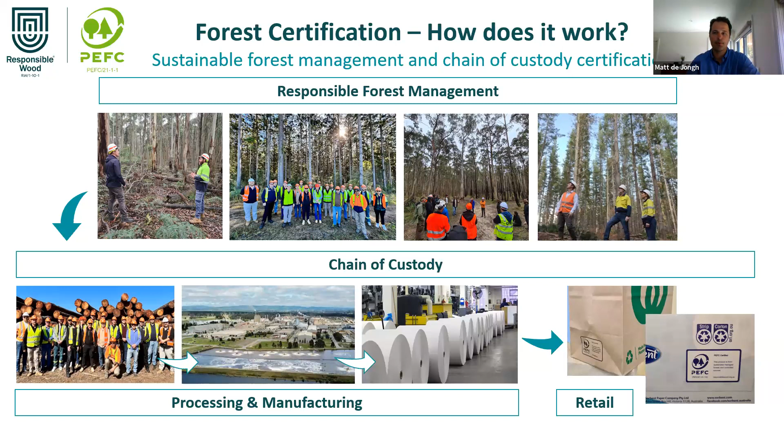So those are all examples of forests that are certified under the Responsible Wood PEFC scheme. And then chain of custody certification. So chain of custody certification basically tracks the forest and wood-based product all the way from the forest, all the way through the processing, manufacturing, retailing, wholesaling process. And that also confirms that the forest and wood-based products have not only come from a forest that remains a forest, but also confirms that it's followed a responsible supply chain process all the way through to the end consumer.

So underpinning certification is the Montreal Process Criteria and Indicators, and these are an internationally recognised reporting mechanism, which covers the environmental, economic and social aspects and management of forests. So not just forests that are available and suitable for forest production purposes, but also forests that are available and suitable for conservation purposes as well.

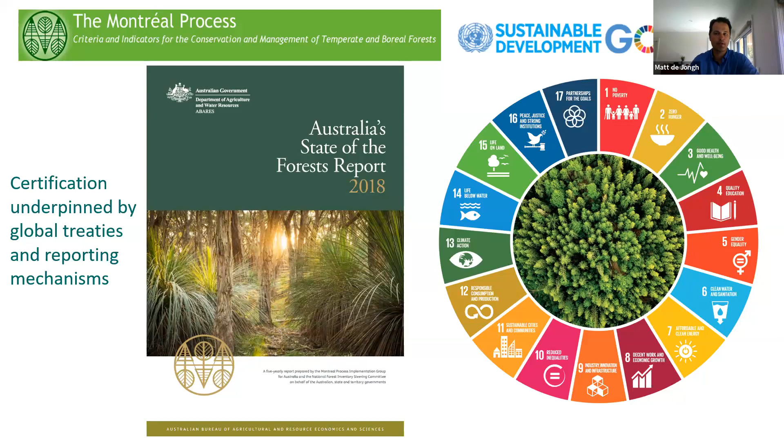Also underpinning forest certification are the United Nations Sustainable Development Goals. And these basically ensure that organisations provide a safe and healthy workplace, and also that forests provide for local communities and demonstrate a commitment to responsible practices and also minimise their carbon footprint. So forest certification is more than just a double check to make sure that organisations are complying with regulation and associated legislation. It also ensures that forest managers and forest growers are abiding by the Montreal Process Criteria and Indicators, and also the United Nations Sustainable Development Goals.

I just want to put this up quickly just to provide a brief overview of the different forest types, particularly in Australia. You might have heard the terms hardwood and softwood used quite a bit. Also the term native forest or natural forest. So in Australia, we have about 132 million hectares of native forests. And the vast majority of high quality hardwood timber is actually sourced from our native forests. When I say high quality hardwood timber, I'm talking about timber that's used for, for example, flooring and decking, and also engineered wood products as well.

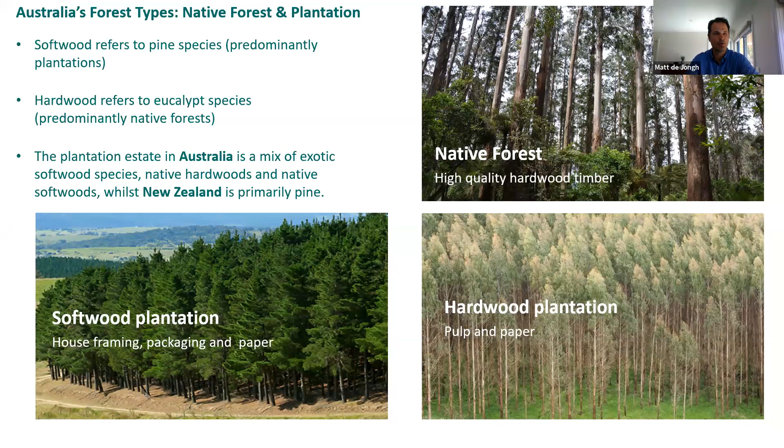And hardwood plantations. So hardwood plantations are basically eucalypt plantations, and they're generally grown on about 10 to 12 year rotations. And the vast majority of product that's derived from those plantations is used for high quality paper, for example. Sawlog material is also obtained from them, but it's primarily high quality paper used in photocopying and magazines and that type of thing. And softwood plantations. So softwood plantations are generally grown for about 30 years, and the vast majority of product derived from our softwood plantations in Australia is used for house frames, but also for packaging and paper as well. We have about 1.8 million hectares of plantations across Australia, which is pretty much evenly split between hardwood and softwood plantations.

So it's not that well known, but Australia is actually the 6th or the 7th most forested country in the world. And as I said earlier, about 132 million hectares of native forest, and about 1.8 million hectares of plantation forest in Australia.

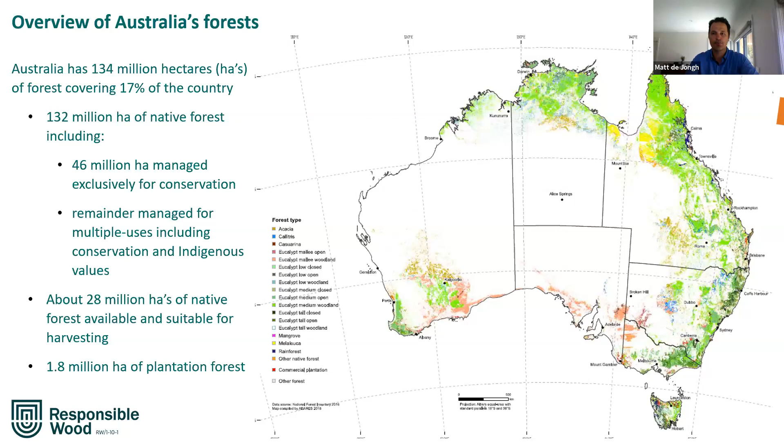So Australia's forests over 65,000 plus years have really adapted to some sort of human disturbance. It's quite well known that our traditional owners used fire as a friend, not as a foe. So what they did was they actually introduced fire into the forested landscape intentionally, because they would intentionally clear sections of the forest. And by clearing sections of the forest, they would allow for grasses to grow where there once were trees, and that would encourage large animals like kangaroos to come in and graze in those areas. And it was actually known as one of the earliest forms of agriculture, known as fire stick farming. So for 65,000 plus years, our forests have adapted to some sort of human disturbance.

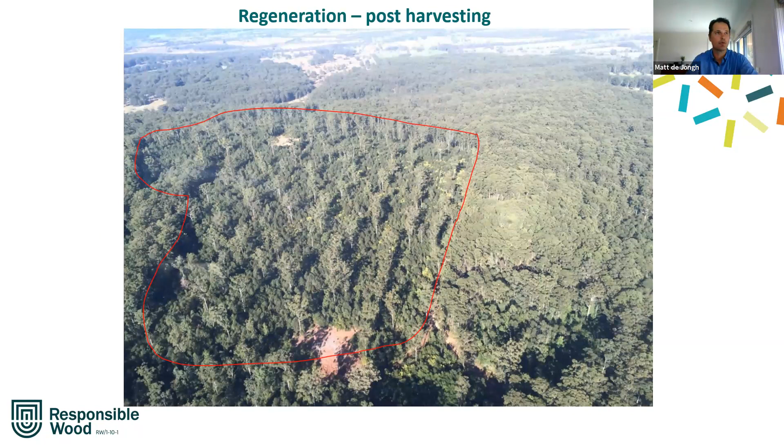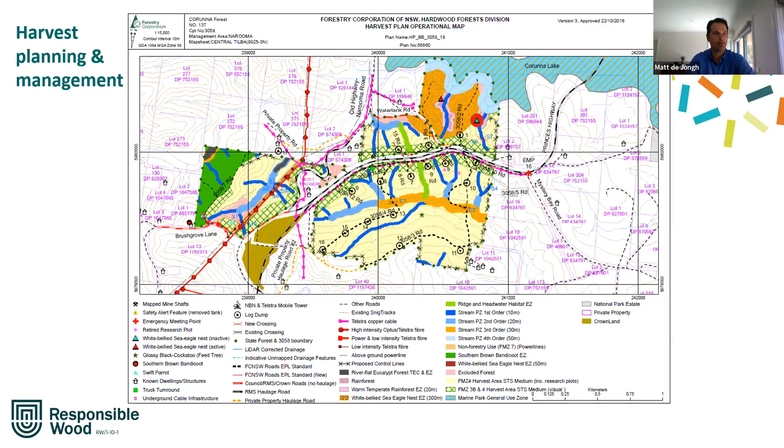And the very last slide I want to share, if you're interested in learning more about forestry and sustainable forest management, we've just been rolling out a few field trips recently. So we actually held one yesterday up at Port Macquarie, and that was actually demonstrating sustainable forest management.

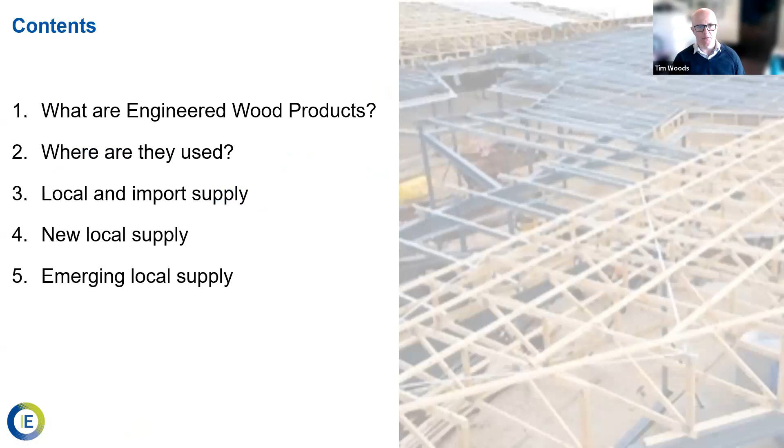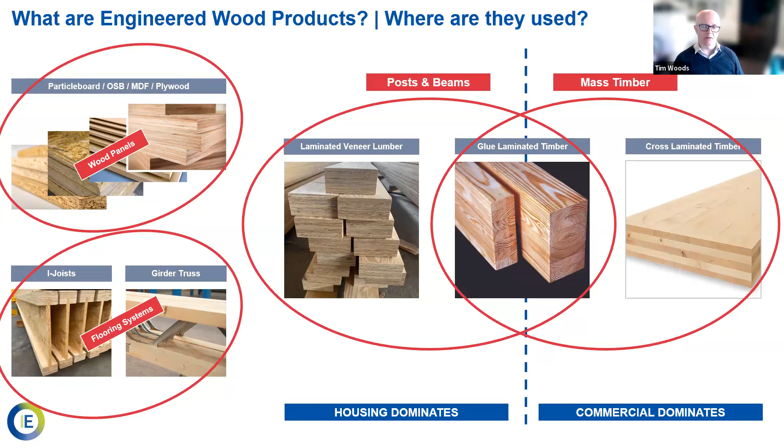You can see down the bottom there that housing dominates on that left-hand side, and the swing point, in my view, between housing and commercial / industrial buildings, is where glue laminated timber can be used in either format, just depending on the size and scale and the particular look that might be being considered, and the sustainability outcomes that are seeking to be achieved. So these are pretty efficient building products, and they're able to be manufactured from product that otherwise might not make its way into the built environment. Their use is growing fairly substantially.

And that's going to be really important for us, because the economic pointy heads, like myself, will appreciate one really key thing in our society is that we have a significantly growing population, and albeit there's been that little bubble through the trough, and now the big spike in population as a result of the pandemic, we're going to see significant population growth over the course of the next decade or more at least, but probably through the next 30 or 40 years, we'll see significant migration-fueled population growth.

And the other thing that goes with that, we've got a growing population, but we've also got significantly declining average household sizes. A household that was once nearly 3 people per household is now down around 2.5 people per household. And every time we drop that, as we did in the pandemic, from say 2.5 to 2.4, we need 140,000 new dwellings. And interestingly, every time we drop that, on average, we need smaller dwellings, because we no longer need the 7-bedroom house. We still need the 4-bedroom house, but we don't need the 7-bedroom house anymore.

We need a smaller house, because increasingly this cohort of less than 2.5 people per household means that we also have a very large number of single-person households, mainly older people, retirees, but not only those. So we're going to have more and smaller dwellings, and we're going to manufacture them in different ways. And there's a really key reason: it's because, to a large extent, our traditional process of building houses is broken. It's no longer fit for purpose.

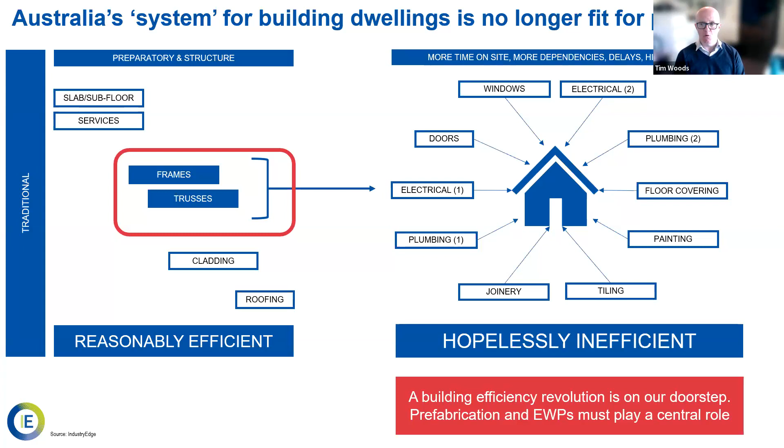So we think that if we're going to have to provide significantly more houses for significantly more people in smaller households, we're going to have to build much more efficiently. That revolution is probably on our doorstep right now, and it involves forms of prefabrication, and engineered wood products are a key part of that. It is absolutely no error and no accident that the introduction of prefabricated frames and trusses into the Australian and in fact the global housing economy came about more or less at the same time as there was big growth in the use of engineered wood products. Engineered wood products built in a factory, used in a factory. Ever since the Industrial Revolution began, we've used factories because they're a more efficient way to do our building. And that's what we're dealing with right now with engineered wood products.

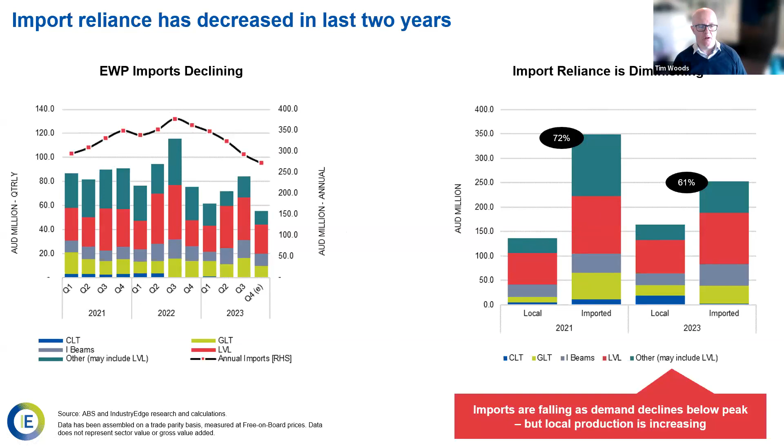Typically, we would have expected about 70% of our engineered wood products to be imported. The import proportion is declining, but it's declining for 2 reasons. One is because consumption has declined, but also because, as you can see here, production of locally produced engineered wood products is increasing. So we've always had sufficient engineered wood products, but more and more of it now is being domestically produced. We've got a 60% reliance on imported product currently. And it's really relevant for those in mass timber.

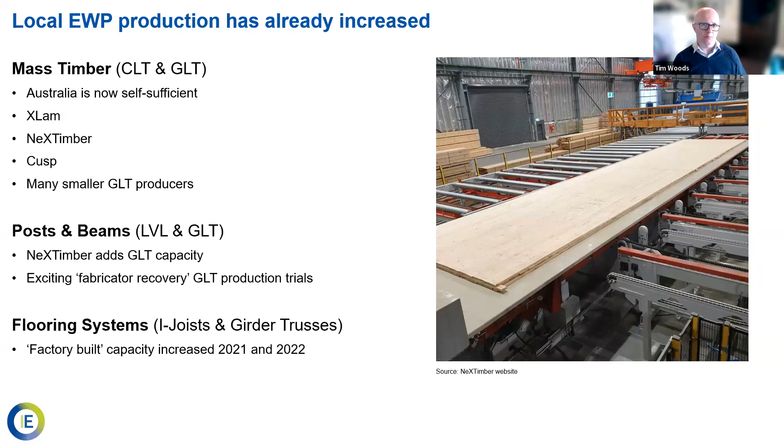Thanks to the work of XLam, NeXTimber and CUSP, among others, we're now self-sufficient for CLT and glulam. Post and beam products in LVL and GLT. The new NeXTimber product by Timberlink adds GLT capacity for those in the housing market as well as in the mass timber market. And there's some pretty exciting recovery of fabricator waste being used to produce GLT post-production, where previously that would have been going to biomass or even to landfill. And flooring systems can continue to be built in many different types of factories.

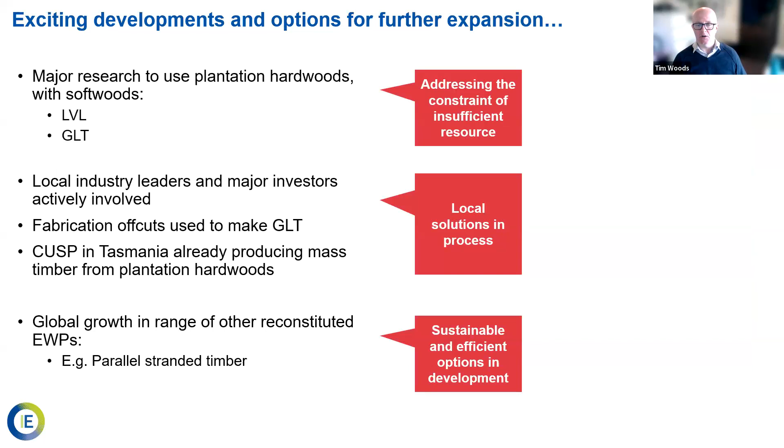Really important things to note too: Matt talked before about plantation hardwoods being used for pulp and paper. There's engineered wood product trials underway in the Green Triangle region, South Australia, Victoria, to produce glue laminated timber and laminated veneer lumber from plantation hardwoods along with plantation softwoods. Instead of exporting wood chips, we might find ourselves at some point exporting engineered wood products, but certainly making more of them locally.

So the sum up really is this, that engineered wood products are efficient, they're highly flexible, they're very useful in factories. Supply was actually consistent during the pandemic, just delayed by shipping. Import reliance is, however, declining because resource efficiency is increasing via domestic production methodologies and expansions. And there's quite a bit of research underway in respect of that. That allows me with some confidence to say that Australia can expect to have sufficient engineered wood product supply long into the future. Thanks very much, Steve.

Thank you, Tim. Fantastic presentation, and I think it's really important that everybody in the industry online here understands that Australia's industry is really making headway in terms of our supply and our various product availabilities. But just my question quickly, I'm not sure if you touched on all of this, but rumour has it that Australia received a great volume of its laminated veneer lumber from Russia until recently. Where is it coming from now, and how secure is that import supply?

Yeah, I think that's important, Stephen. True. A significant amount of LVL came directly from Russia prior to its illegal war on Ukraine. Almost immediately, the supply chain switched to supply from Turkey, some from Southeast Asia, some from China. There is a question, and this goes to the question of certification and reliability, about some of the Chinese material and whether it involves logs that might have come from Russia. How do you find out? You check with certification bodies like Responsible Wood, and you do provenance testing.

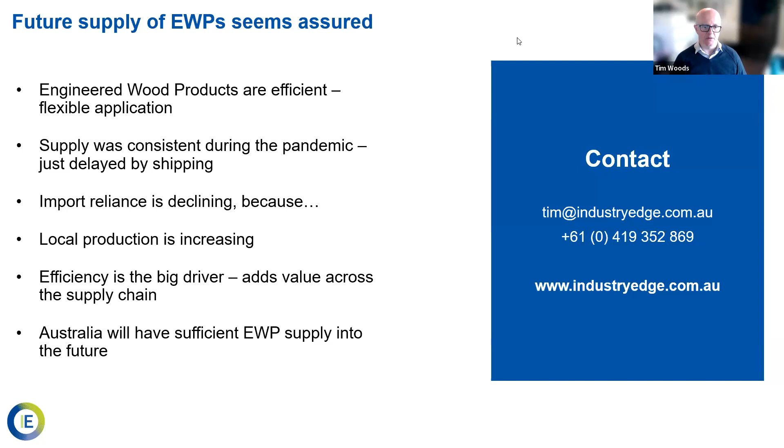We've also received significant amounts of additional supply from North America, which comes and goes from our market depending on how strong their housing market is. So there's always been supply available, and there's always been that swing capacity available, notwithstanding a pretty significant volume that was coming out of Russia for a while.

Okay, great. Really good to know. So if anyone's got any questions around source, get in touch with our suppliers and our experts today. Thanks again, Tim.

Our third mythbuster is someone probably well known in the industry. I'd like to introduce Karl-Heinz Weiss, Director at Weiss Insights, who will today bust why timber buildings are a fire risk and can't be insured. Carl? Thanks, Stephen. Thanks for having me. The title and that myth is a hard one to bust, right? Let me just share my screen.

Here we are. It's a hard one to bust because obviously timber buildings are a fire risk. We all understand that, and we have all experienced sitting in front of a nice timber fire, and it warms, so timber burns. And the second part to that: can timber buildings be insured? There are actually two slightly separate aspects in that myth, which we're going to try to unpack in the coming slides.

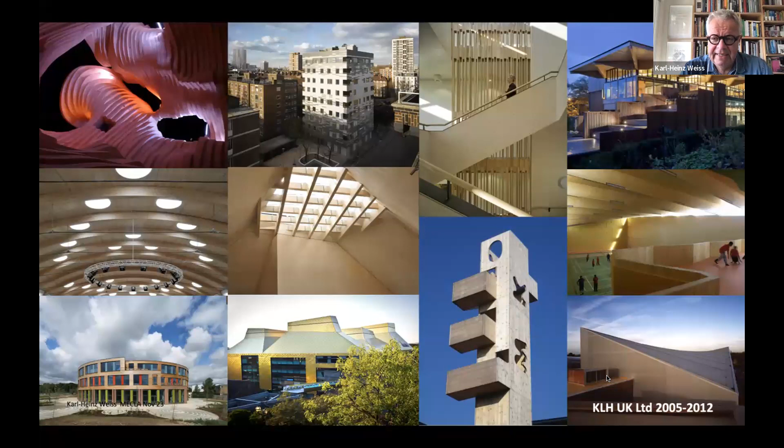Firstly, a blank confirmation: yes, timber buildings can be insured. I can say this confidently because I've been involved over the last 18 years in over 100 buildings in Europe and in Australia, and they can be insured. I'll highlight one very briefly. It's Stadthaus Murray Grove, built in 2008. So about 15 years ago, more or less on the day, people started moving into this building. And interestingly enough, there has been a fire in that building, post-occupancy.

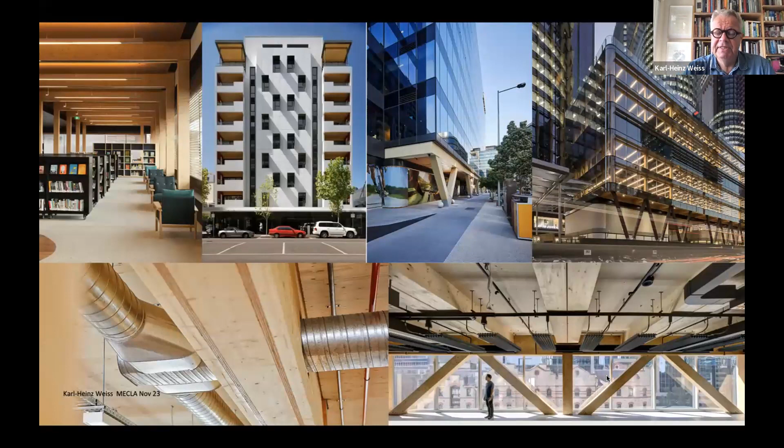So how can you get a building like this insured? There's a lengthy story to be shared, but the CBA head of risk, CBA being one of the mortgage providers, really tried to get a good understanding of how the system works. What's the product? How is it manufactured? How is it being assembled? I spent an entire week with him traveling in the UK and showing him around. That probably describes a bit of the journey everybody is going through.

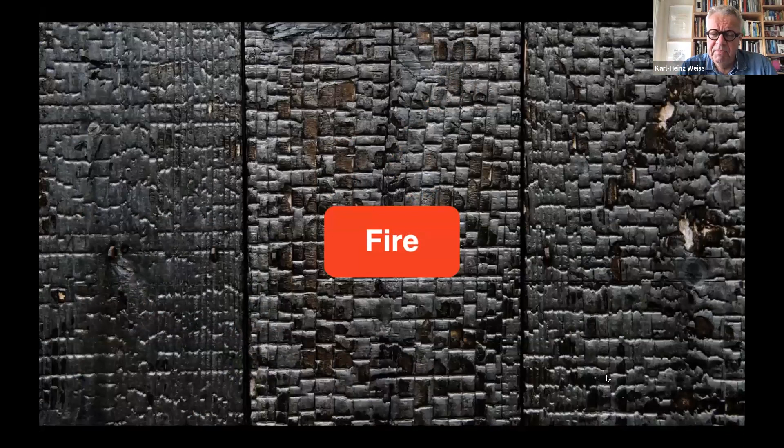So what actually makes a fire? I think that's an important understanding I want to share with you just at a very high level. We can talk for hours on this topic. But actually fire in a building, regardless of the structure, regardless of the material, regardless of the use of the building, always requires 3 key ingredients. It needs an energy source, it needs combustible material, and it needs oxygen supply.

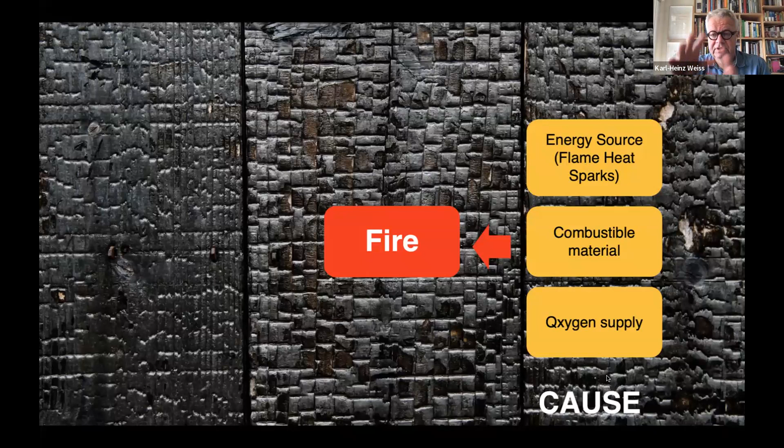So just to describe, this is the cause of fire. And in the case of a timber structure, it's a slightly different story. The fire doesn't start with the timber structure. The timber responds to the fire. So you've got an increased temperature, you've got a fire load in the building. And actually most of the fires, over 40% in New South Wales, are triggered by electrical faults. Cooking is one of the issues, ironing boards, etc. So about 40%, the root cause goes back to electrical faults in equipment.

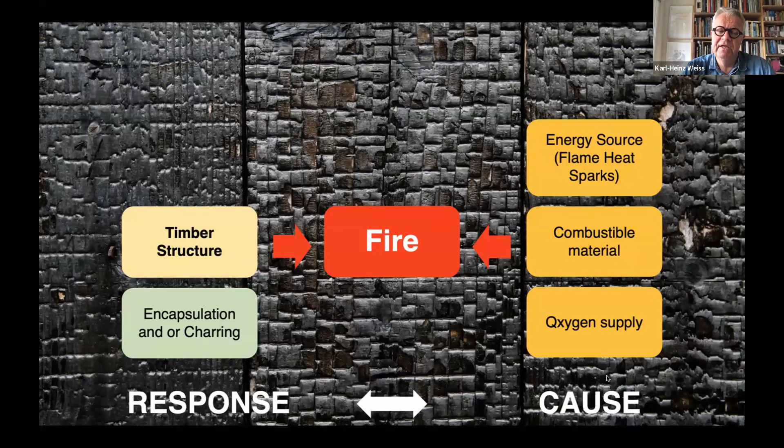So timber responds to the fire, and the immediate reaction is let's encapsulate the timber or calculate with a charring rate. And obviously you see that image in the background. Charring means the timber starts to char, and the char layer creates a layer of protection and insulation of the core timber, the structural material.

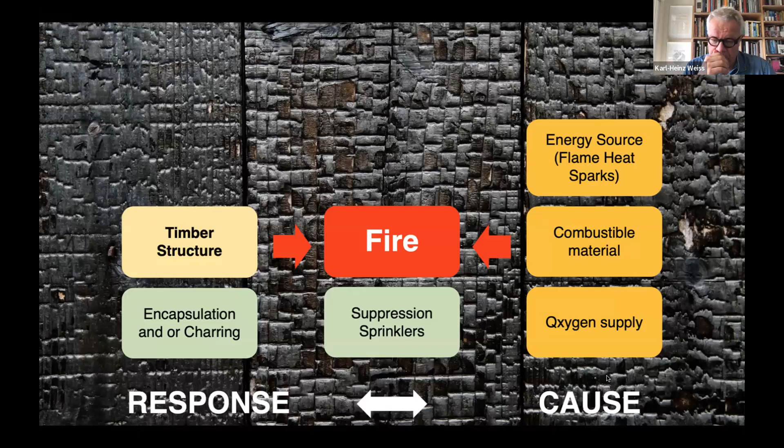The other aspect, which is addressing the fire directly, is suppression sprinklers. And I think this has in the meantime become really good practice, especially having apartment buildings taller than 3 floors fully equipped with sprinklers. And the other part of really good practice is to engage a fire engineer and engage with key stakeholders. And my experience shows talking to the brigade, talking to insurers and other key stakeholders early pays off, because everybody will participate on that journey.

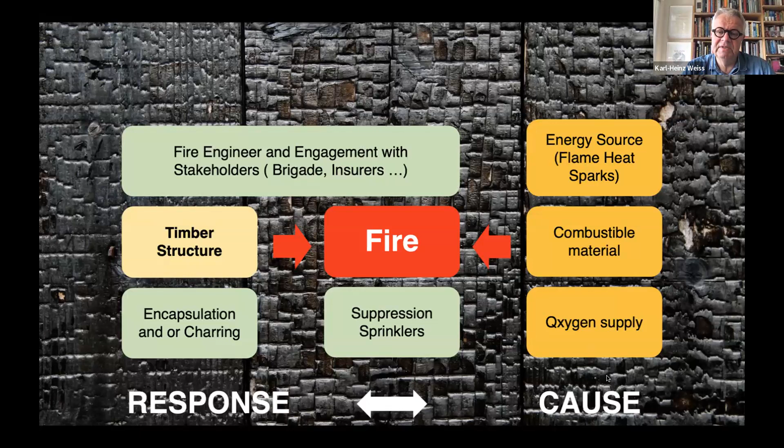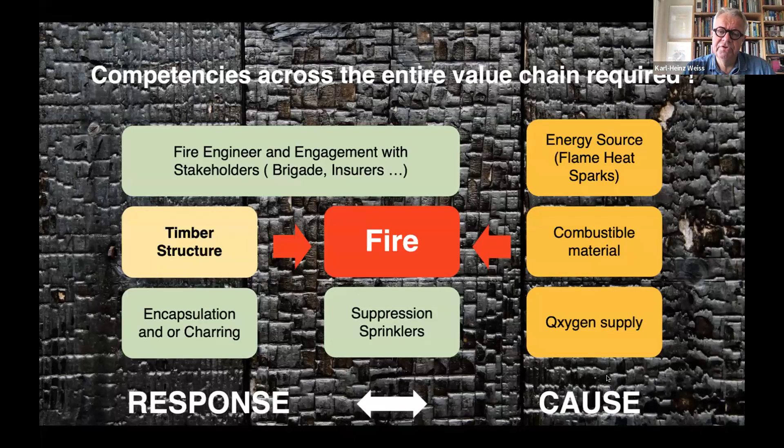And that kind of engagement starts building competency. Competency across the whole value chain is required. And if we go back for a second to the Grenfell Tower fire catastrophe, it shows that across the whole value chain and decision-making chain, incompetency has led to that catastrophic outcome. Again, it's not driven by materials, it's by incompetent decision-making throughout. And insurers start understanding that.

So the typical approach to create certainty around product performance is you look into code, you execute testing, and timber has been burned across the globe to a significant amount to really gather data, and data is available. However, most of the testing refers to the EN 13823, the SBI, a single burning item test. So you look into a product in isolation, you build little corners of a room, and you test a product, which is not really a direct real-life scenario.

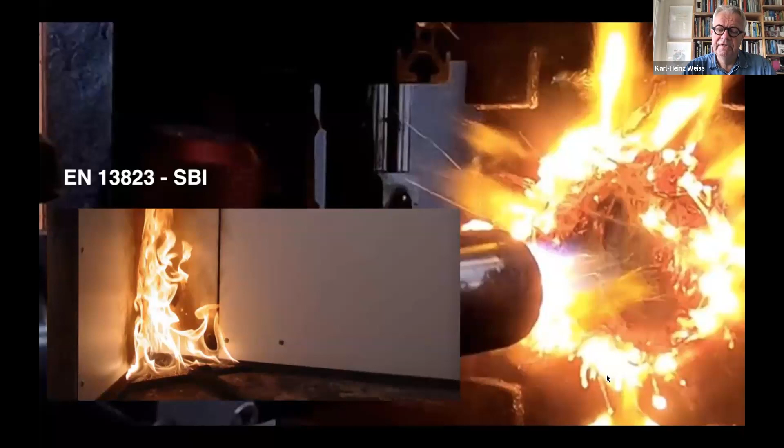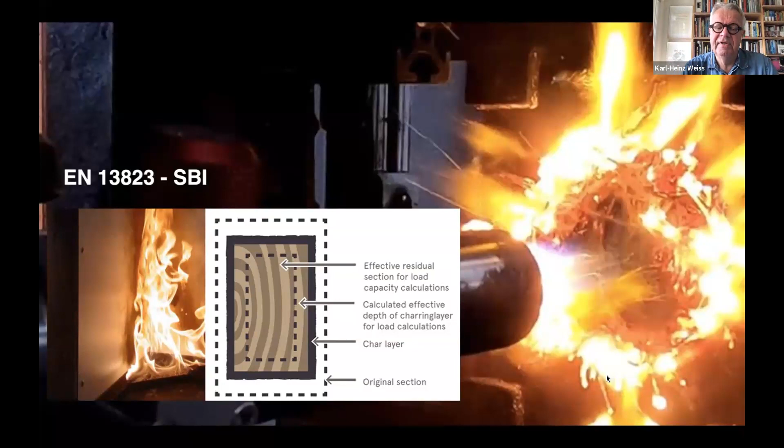The other part of certainty we create, and I see Stephen popping up, so I'm running slightly over time, so I'll speed up now, is looking into charring, so the char layer around the core structural element, protecting its structural integrity. However, it's not only about fire, and if we look at the insurance aspects, there are again three levels: smoke, fire, and one of the big concerns is water and water ingress, even during fire or firefighting.

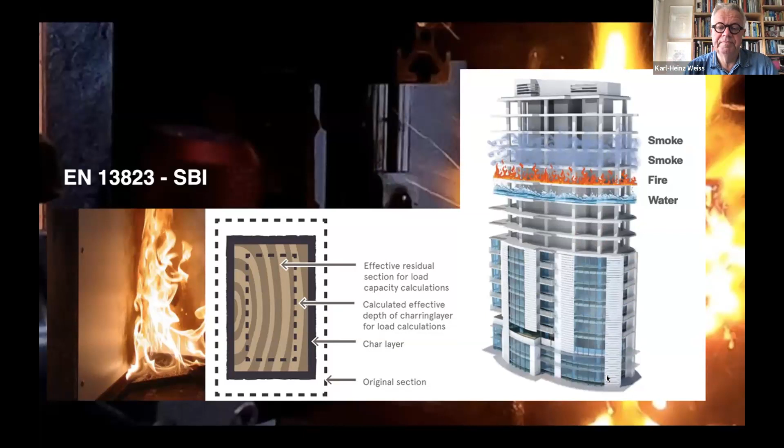So what is the insurance role? Insurance looks at the physical asset, the building, and looks into the asset performance, the asset delivery in construction, and asset operations and occupation. So that's the insurance focus. And the insurance customer is the owner, the investor, the mortgage lender. They want to ensure the asset they're insuring has got the right value and doesn't lose in value. And that means the focus is on damage or loss of property. And they look as well into potential risk of business interruption.

But in summary, there are 6 aspects insurers look into: occupancy, scale of building. Occupancy means how the building is used; structure and fabric, and there again, timber is one element of that; other risk factors like landscaping, balconies, etc. And then insurers will look into your fire mitigation strategy and water exposure mitigation strategy. That's an important part. And once you work through these details, insurers are on board and happy to provide insurance.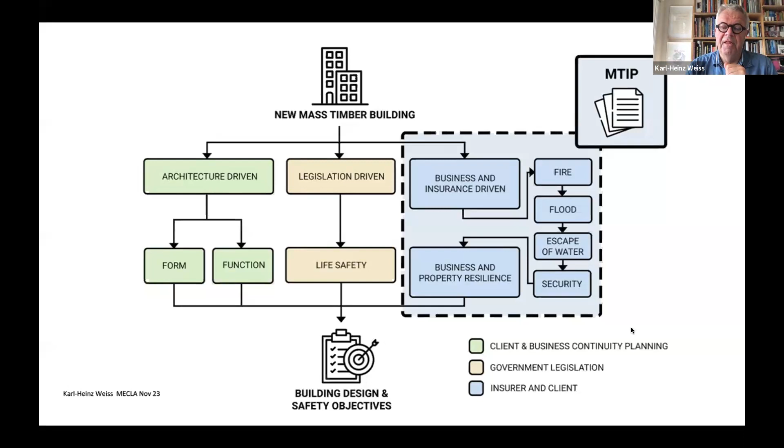In another context, obviously life safety is governed by legislation, and insurers look into fire, flood, escape of water, security aspects of the building, call it building or property resilience, really from a strong focus on the asset.

That graph has been taken out of an interesting resource. It's the Mass Timber Insurance Playbook. It has been put together in the UK, in collaboration with insurance companies. It's worthwhile, and it's free to download. So keep that in mind and work through it, because it's very detailed in all the risk aspects.

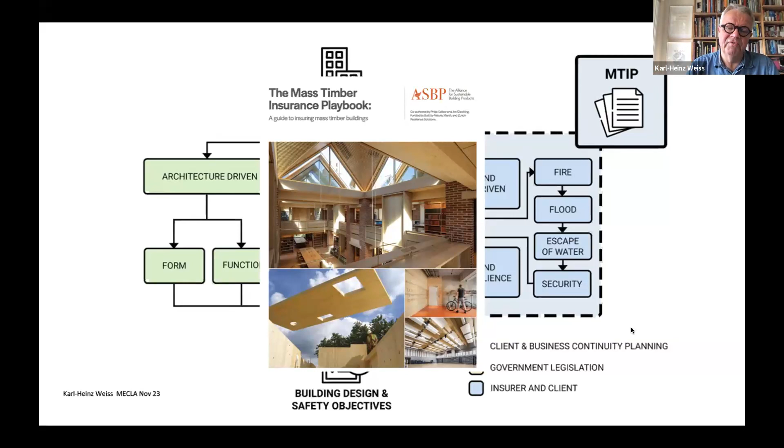And again, just in summary, building competency is a continuous journey. As we all go through a driving license process, we have to build a competency, and then insurers will drop their premiums once you have successfully been trained. And last but not least, "fail fast, learn fast" is a phrase we hear so often. It is not an option for the built environment, because we're dealing with the safety of life. That's me.

Thank you, Karl. I think perhaps in this country we're still on our learner plates at the moment. That's really interesting, because from my involvement with MECLA over the last year, it's been really interesting to understand who across parts of the industry does and doesn't have a lot of knowledge and experience around this, which informs those solutions to help break down the barriers. At the heart of what you're saying today, it's about educating the insurance industry around this.

My simple question for you on this myth was going to be: do we need to clad the beautiful timber in fire check or fire-rated board in order for it to be an acceptable solution? Or do we just over-design the char in the timber members? Does that help us get there? But it seems to be much more complex. It is much more complex.

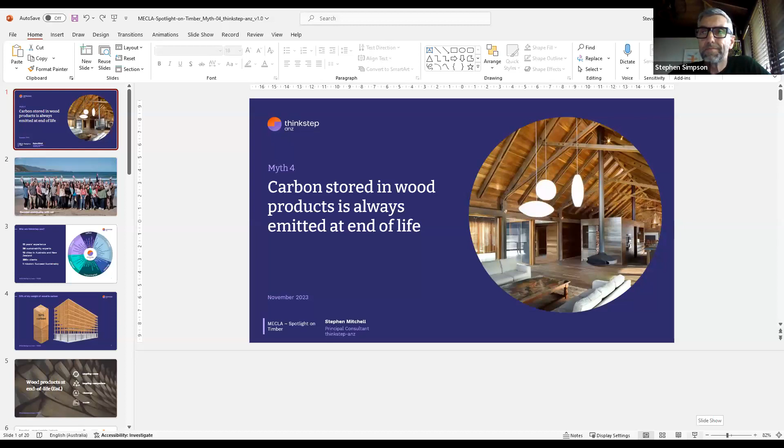My next speaker will be Steve Mitchell, Principal Consultant at thinkstep, and Steve will pose the myth that carbon stored in wood products is always emitted at end of life. Steve, over to you. Thank you, Stephen. And thanks everybody for having me here today.

So my myth looks at the other end of the supply chain, the end of life, after the building has come to its final use.

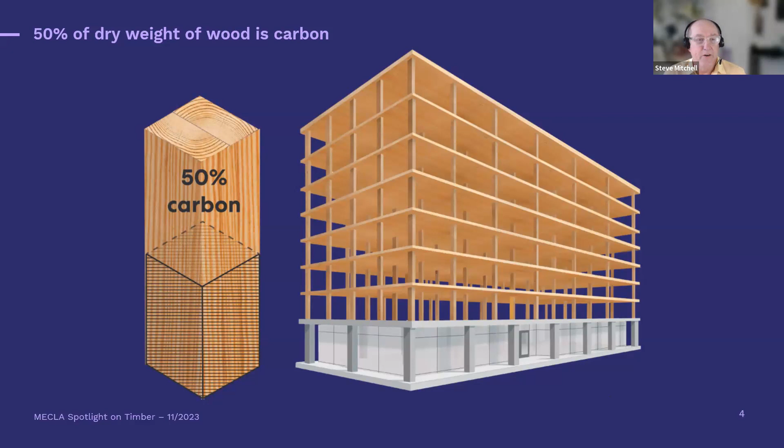So just a basic concept, which many of you would be familiar with, but 50% of the dry weight of wood is carbon. Carbon compounds make up most of the wood, and when it comes to a molecular level, 50% of the dry weight of wood is carbon. So we have to know our carbon story really well. And at end of life, there are different implications of where that carbon goes.

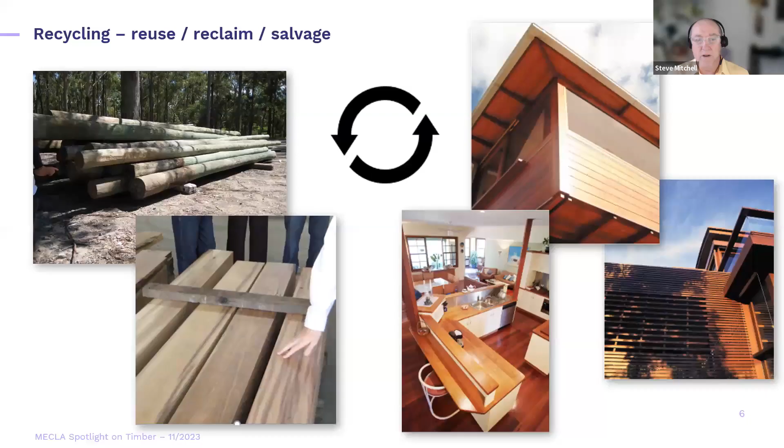I'll briefly touch on these three items, recycling and bioenergy, and focus my main presentation on the landfill, but I wanted to briefly touch on these other management options for timber at end of life as well. So recycling, reuse, reclamation, salvage, a lot of the design community and people are very familiar with this idea of taking timber from old bridges, old buildings, old telegraph poles in this example here, and converting that, reusing it as it is, or cutting it and reusing it into another form, such as is beautifully done on the right-hand side of these pictures. Plenty of reclamation salvage companies around Australia where you can find this timber.

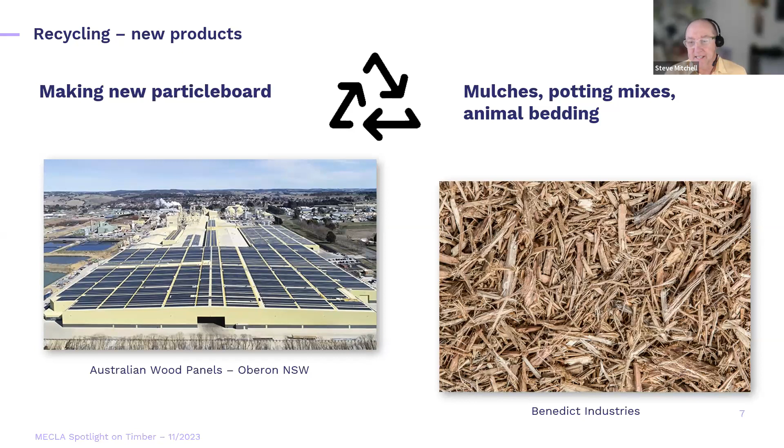Now, recycling, you're turning the product, the end-of-life timber, into a new product, and increasingly what's happening with a lot of end-of-life timber is new particle board is being made. A fantastic example out at Oberon, New South Wales, which, by the way, has the largest industrial solar panel production on its roof in Australia. They convert a lot of end-of-life wood into new particle board. What also happens is that low quality wood, end-of-life wood, finds its way into mulches, potting mix, and animal bedding. Obviously, the carbon of these gets extended into this new life of these products.

Now, bioenergy is also increasingly happening in Australia. End-of-life timber is substituting for coal in cement making. And that includes at a facility south of Sydney at Berrima, run by Boral Cement, as well as Birkenhead near Port Adelaide in South Australia by Adbri. So this end-of-life timber is helping reduce their fossil fuel embodied carbon content of their products. Now, obviously, the carbon in this application is completely released back into the atmosphere.

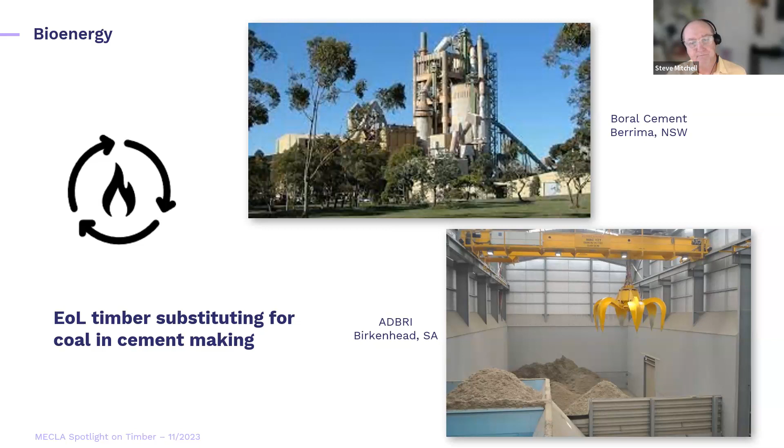Now, what happens to the end-of-life wood when it's disposed to landfill in Australia? Well, at the moment, about 59% of all end-of-life wood ends up in landfill. This has actually decreased quite a lot in the last 10 years due to those other options for end-of-life wood becoming more economic. So I think even 10 years ago, it was probably more like 80% were disposed to landfill. Now it's like 59 and reducing. But still a lot of it, the majority of it goes to landfill.

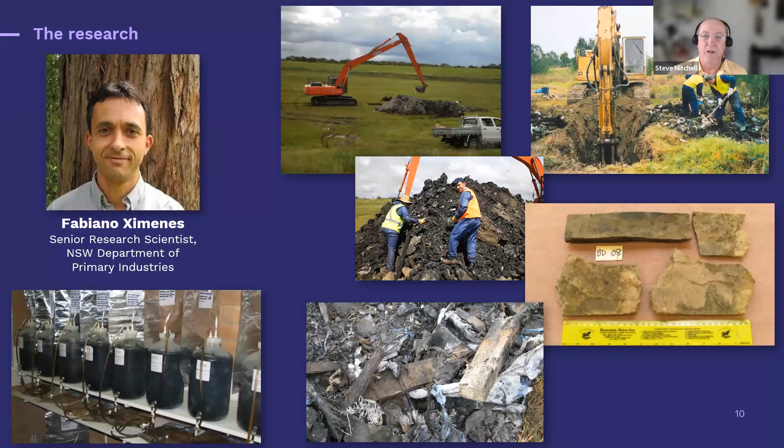So here's some samples of wood that spent 46 years in landfill. Now, that's been cleaned up of its mud and whatever, but you can actually see that there's been very little degradation of the wood in the landfill. The environment is not conducive for degradation. And so they're consistently finding this in every research project that they've undertaken: very little degradation and decomposition of that carbon in the wood, resulting in very low emissions to the environment.

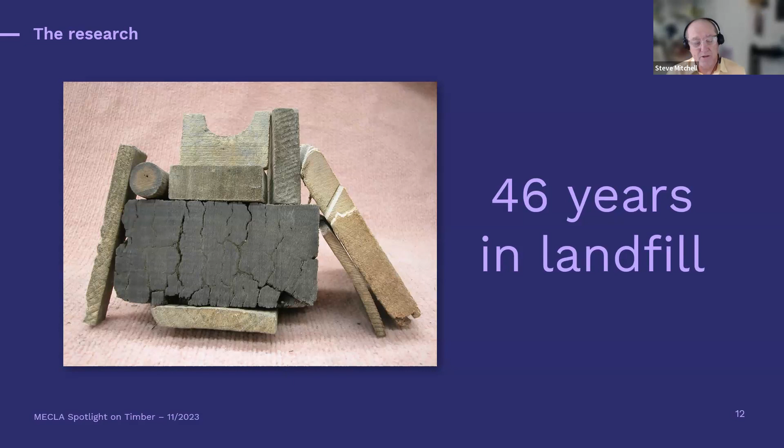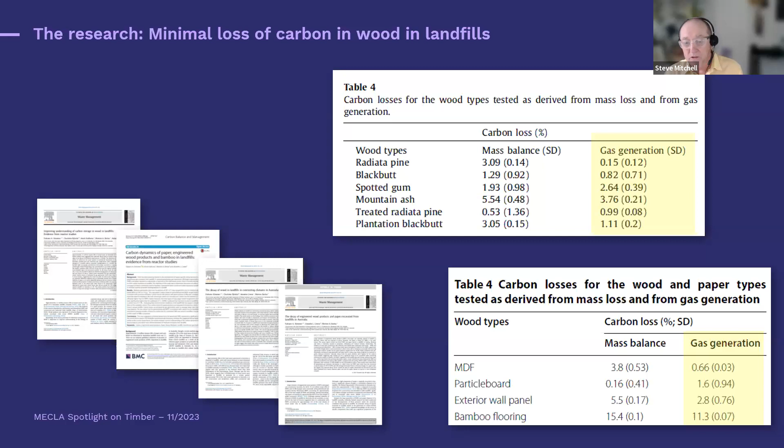Now, I'm not going to, in the time available, go through this data in specific detail. There is some variation between species, and the operation of a landfill is not just about how it degrades, but also that some of that very small volume of degradation that does happen is absorbed by the landfill, the soil that covers the landfill. In some landfills, any methane generated is also burnt off. But on the whole, the studies are showing that a maximum of 1.4% of the carbon in end-of-life wood products is lost from Australian landfills.

There are other researchers in the United States researching this topic, because landfill is a top popular waste management option in the United States and in New Zealand, and they're consistently finding the same results for all wood products. Interestingly, you'll see bamboo flooring down there, which is a grass-based product; they're finding that the carbon loss from those sort of products is significantly higher. But overall, a maximum of 1.4% of carbon is lost in end-of-life wood buried in landfills.

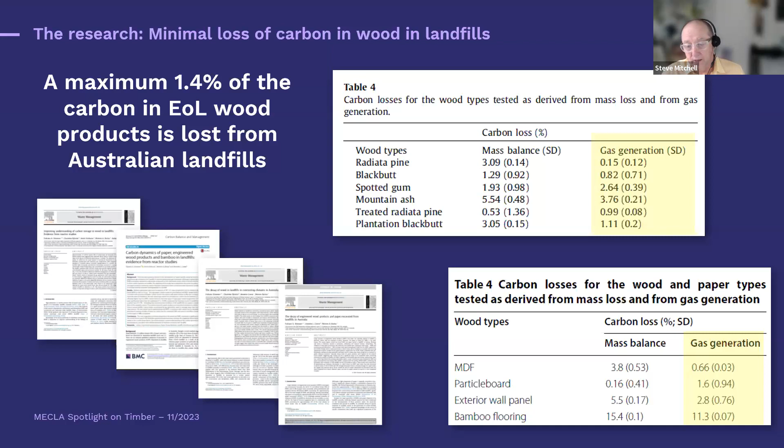Now, this research is actually finding its way into the IPCC, included in the Global Emissions Database. So it's finding its way into the peer-reviewed research and into the IPCC databases. Again, I'm not going to go into the detail of this particular graph, but these factors for wood products and their degradation in landfill have come down a lot over the years. They started off very, very high, which might be a source for that myth, because there was a very, very conservative view taken back in 2006. But as the research has developed, the numbers keep coming down further and further until, with these studies of Fabiano and his team, you get down to the 1.4%.

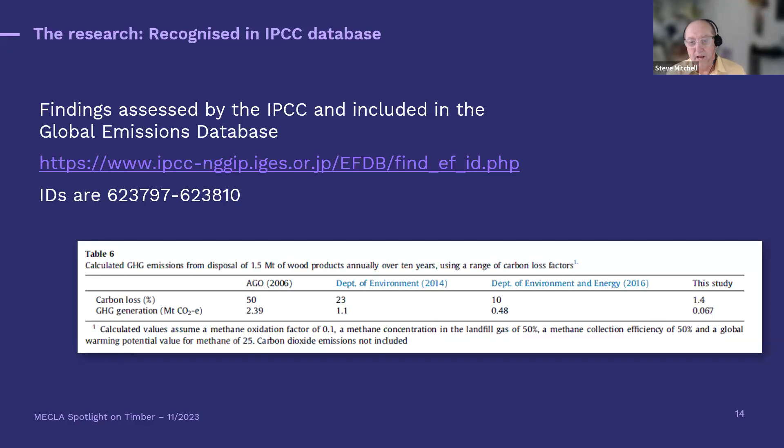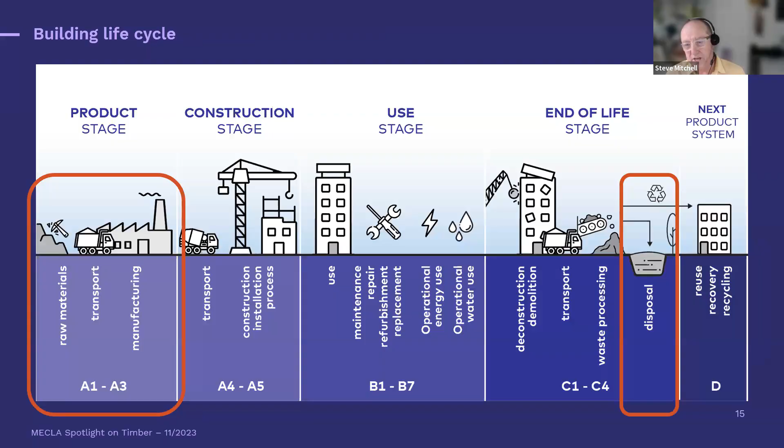Just briefly, how do we use that information in building and construction? Well, anyone familiar with EPDs is familiar with A1 to A3, the production stage, and how you account for carbon emissions during production. Well, C4 is where you account for the end of life stage and the emissions at the end of life stage. So with the development of EN 15804, the EPD core rules for construction products, we actually include the values for degradation in landfills in the C4 module. In the latest versions of EN 15804, we have to include this information in the other environmental information section of the EPD. If anyone's got any questions about that, happy to answer them.